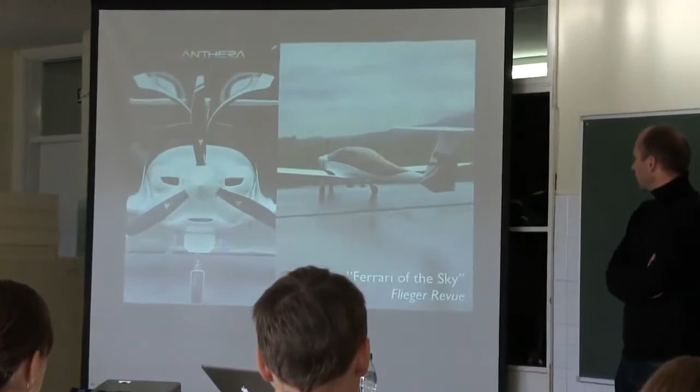This is the first exit of our company from the ultralight or light sport aircraft market into the fully certified private pilot territory. This is a general aviation aircraft, four-seat, designed for high aerodynamic efficiency and also designed to appeal. I will focus on this design later, but this aircraft didn't even fly yet. This is just the prototype built, and right now it is in the structural testing phase. We expect the first flights to begin later this year.

Okay, this is a design cliche. All the designers know this is such a cliche that I will not even go into it, but it's attributed to Louis Sullivan, a modernist architect who says that form should follow function and not vice versa. So whenever you design a product or a building or whatever, the form should follow whatever the purpose of the object is. And this is according to Wikipedia, if you can trust random strangers editing things.

What was interesting is that on the same page, you can find the sentence that modernists believed, perhaps incorrectly, that airplane design did not involve any aesthetic decisions by the airplane designers. So airplane design at that time, in the modernist era, was considered the purest form of design, because the aircraft is designed just to perform its function, and its form follows from that function. So aircraft design is interesting from that point of view.

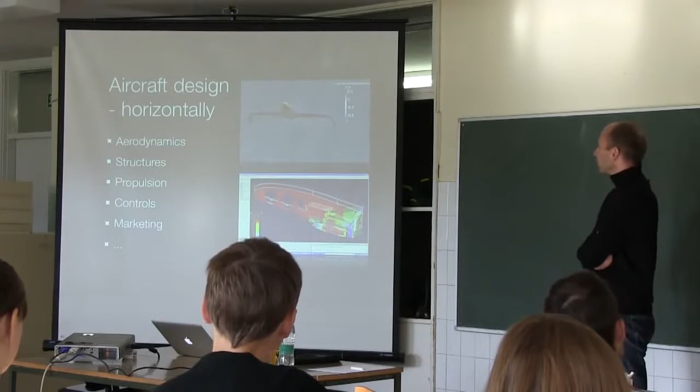Structural design is just as important, if not more, because if you cannot support the loads experienced by the aircraft properly, the aircraft breaks in mid-flight, which is of course not desired. But if you build the aircraft too strong, too conservative in structural design, you create an aircraft that is too heavy, and weight is the killer for aircraft performance. So optimization of structures is just as important as aerodynamic optimization.

And then you need experts from propulsion technology. Right now electric aircraft are gaining a lot of attention, but piston engines and turbine engines are still the main engines in the market, so you need experts from propulsion, from controls, and don't forget the marketing aspect of any design. If you cannot sell the aircraft, you have to start all over again. Usually in aircraft design, each project is so expensive and takes so long that without a clearly defined market and expectations, a single project can really kill the company.

So even for big companies like Boeing, if they had failed with the Dreamliner, which didn't get off to the best start but is a successful design, you can quickly bury the company with a single wrong project. So this is all the knowledge that you require.

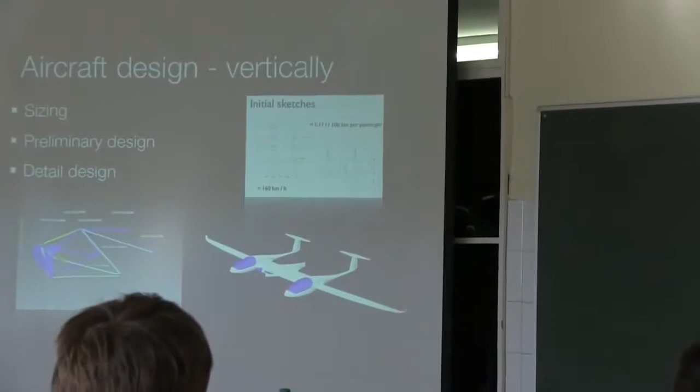But how do you apply this knowledge? What I'm following here is just standard textbooks. There exist textbooks on aircraft design, and typically the process is split into stages. You start at the top with the idea, and then you size the aircraft—this is the first step. First you figure out, based on very simplified models, how the aircraft would perform if it had such a wing, such a long fuselage, etc.

You estimate how the aircraft will perform and then iterate the shape of the aircraft, the general shape, the layout. This is on the level of how big the wing will be, how large the wingspan will be, how long the fuselage will be. Then you estimate the weights, etc.

And then you sort of get an idea of how big the aircraft will be and all of its surfaces. However, even at this stage, you need input from all the disciplines I mentioned. Namely, aerodynamicists will tell you how big the wings must be to carry such a structure. The structural engineer will tell you how heavy the aircraft will be estimated when you draw a shape, etc.

So already at the first stage, you need a complex team of people working together on the design from the very start. So if you listen just to your aerodynamicist, or just to your structural engineer, or just to your propulsion guy, you will just focus the design on some aspect and you might fail completely because it won't take all the aspects of the design in the beginning.

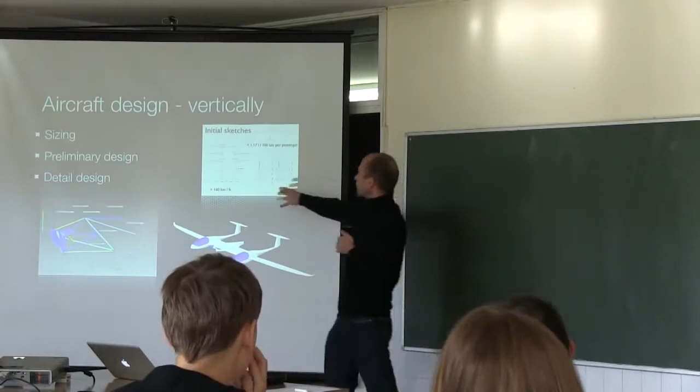After you are quite happy with the sizing, this is an example of the sizing of the aircraft, different sketches. You try different configurations, and this is a very quick process, so this can be done for a small aircraft in a month or so.

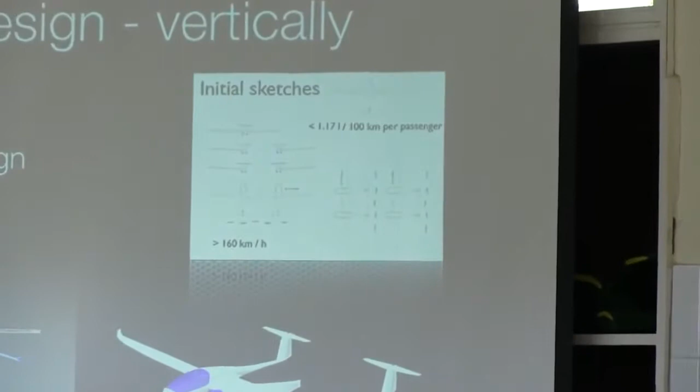Then you go to preliminary design, where you take this general geometry of the aircraft and you actually start building proper surfaces for it. Namely, you will set the aerodynamics for the aircraft, choose the wing sections, basically design the general shape, and the general structural concept of the aircraft, but you do not go to the finest details like every bolt and every screw, etc.

This is something left for the last stage, detailed design. So in the sizing stage, you have a couple of engineers working, then in the preliminary design, the team expands, and then when you go to detailed design, for example, this is an example of an engine mount, where you have to have all the mounting points, etc. This is where you need, in the end, the biggest team.

And when you get to the detailed design phase, you better be sure that the preliminary design will work as expected, because going backwards to revise the design at this stage is very, very expensive and time-consuming. But it happens, so you do revise design, you just have to be careful not to do it too often.

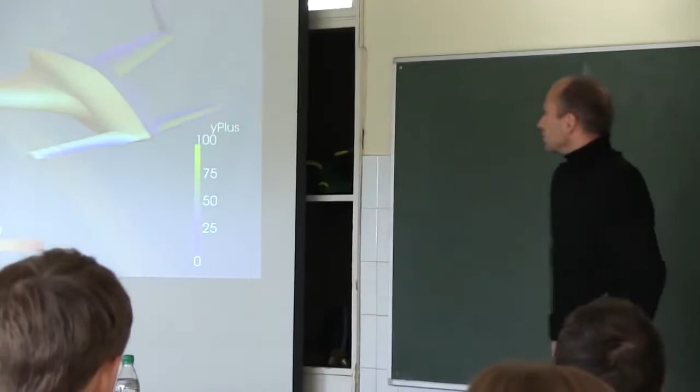Here I'm showing some study of what I do, really. So sometimes we just take over only parts of the design. I will tell you how complex the design will be and how different fields, namely in this point it was marketing versus aerodynamicist, can work on a problem.

This was a project given to us by an Italian company who designed this general shape. As you can see here, it's a canard aircraft, meaning that the elevator is on the front surface, for those of you who like aircraft, and the wing is in the back. Not a very good configuration if you ask me, but the marketing likes it, so they said, okay, but we lack lift. We lack about 50% of the lift we need for the aircraft to perform the minimum flight speed.

And of course, we would say, well, that's because it chose a canard design, but marketing said, okay, you have to work with this - their marketing department, not ours. And they said, okay, you can work on the external shape, but do not change the aesthetics. So how can you do that? How can you work on the shape but not change the aesthetics?

And sometimes in aerodynamics, you can do just minor things, minor details that can help. The top is the original design, the bottom is our optimization of the design. We gained about 50% of lift with the bottom, and it's quite hard to distinguish any differences between top and bottom.

What we did was change all the airfoils, redesign the front flap, but the general aesthetics of the aircraft remains the same. We did have to increase the wing in the end by 10%, but still we gained 50% lift with just minor changes. So you have to play between two aspects sometimes to optimize the design, and then you can get both teams happy just as long as you listen to each other very well.

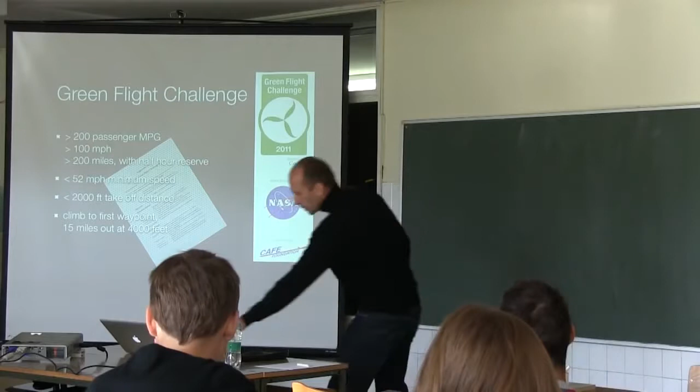Okay, who hates imperial units? I do. This is better. So in more common units, these were the requirements.

The booklet was about 50 pages thick of the regulations, but these were really the requirements which fixed our design, let's say at least at the sizing stage. And then later on we had to, of course, take other aspects into account, but these are really the constraints for the aircraft. Namely, the aircraft had to spend less than 1.17 liters per 100 kilometers per passenger.

So if you had 4 passengers, then you could spend 4 liters of fuel, or energy equivalent of regular gasoline. So clearly, because of the energy conversion efficiency, electric aircraft were favored in this competition. If you can get an energy efficiency conversion of about 40% for a piston engine, electrical energy conversion from batteries to propeller is about 92% in our case. So there is a clear difference.

However, the aircraft had to have this efficiency at speeds over 160 kilometers per hour. So this was no easy task. And at the same time be able to cover more than 300 kilometers of range with half an hour reserve energy left on board after landing.

Furthermore, the minimum speed had to be below 83 kilometers per hour, another very critical issue. And the takeoff distance had to be less than 600 meters. And at the same time, this was mostly on the front page.

But then later, if you go through the regulations, when you see what the course was like in the competition, you realize that you had to climb to the first waypoint, which was 24 kilometers away from the airport at the height of 1,200 meters. So you required a certain climb rate to be able to reach this altitude quickly enough.

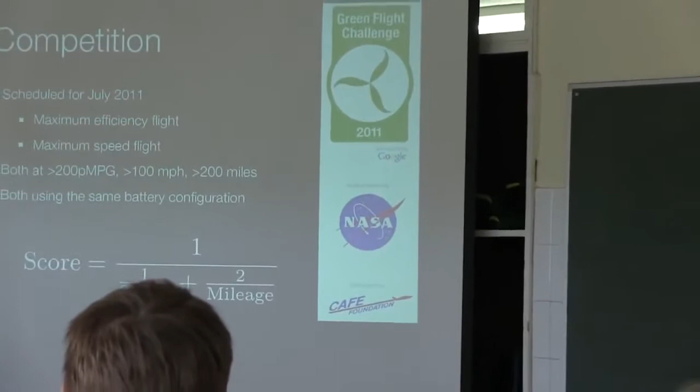So the competition itself was originally scheduled for July 2011 and was comprised of 2 flights, namely 2 days of flying. On one flight you had to fly with the maximum possible efficiency of your aircraft, and on the second day you had to fly at the maximum possible speed that your aircraft could reach.

However, there were hard constraints. During both flights you had to fulfill all of the requirements I said before. So namely, your efficiency had to be good enough and you had to be faster than 160 kilometers per hour.

And furthermore, the competition stated that you were not allowed to change battery packs on your aircraft. If you had an electric aircraft, the battery configuration was frozen at the moment you took off for the first flight. So on the second flight, you had to have the same battery configuration. And these are the requirements that really limit you.

What is the problem that you freeze the battery configuration? For those of you who work with batteries or who know how batteries work, what's the biggest problem with batteries for aircraft?

Sorry, they are very, very heavy. Yes, so if you want to fly fast, you will of course burn more energy. If you want to fly really fast, you need more and more batteries.

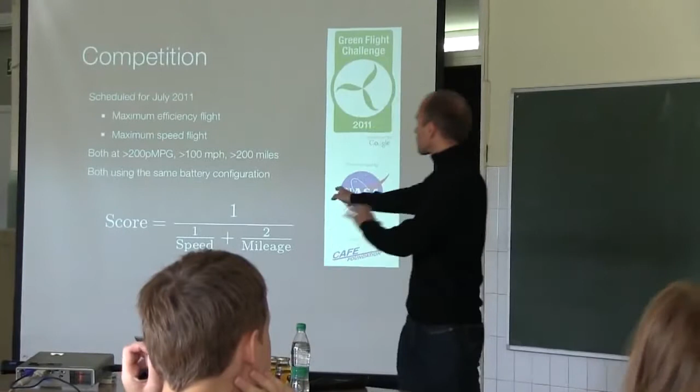However, if you want to fly efficiently, you need a little weight, so you have to reduce the amount of batteries. You have to have a compromise on how many batteries you put into the aircraft to get the best result. The total score was taken from 2 flights, and if you take imperial units, there is a formula: speed is in miles per hour, mileage is in passenger miles per gallon, and then you get some result from both flights.

So what did we do? We wanted to compete in this competition, but when the competition regulations were published, there was simply no aircraft that would fulfill them. They simply didn't exist. So we said, okay, we have to design something new.

We started, of course, with the 2-seater aircraft. This is what we had, and then did a concept study. However, the problem was we wanted an efficient aircraft, so it had to have a retractable undercarriage, and only the Taurus aircraft, the glider from our range, has a retractable undercarriage.

And the problem was where to put the engine. If the engine was put on the mast, as you've seen before, then you get such a forward pitching moment that whatever efficiency you gain in putting the engine away, you lose because you have to trim the aircraft. You have to pull really hard back on the stick to keep level flight. So that was really not such a good idea.

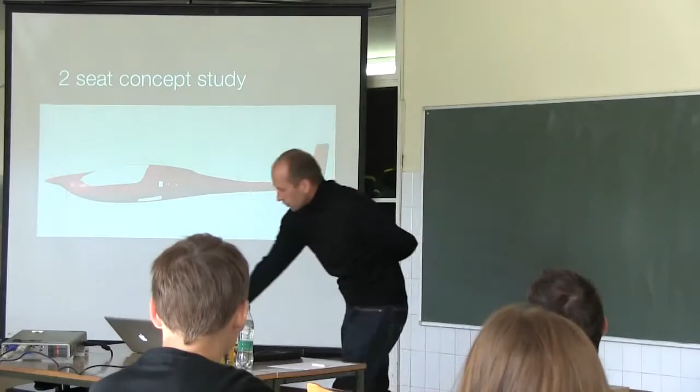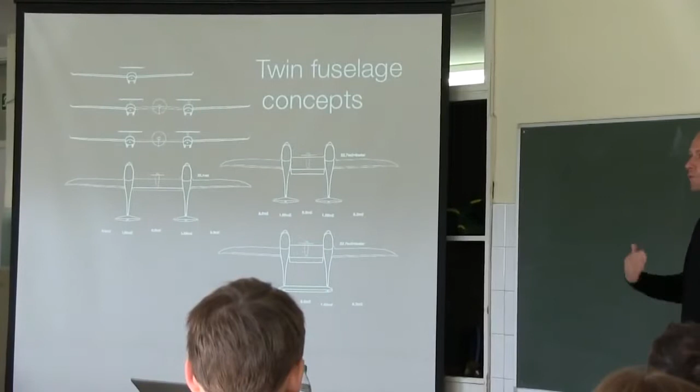So we were looking at whether we can put it on the nose or whatever. And then the colleague of ours who was the project leader for this said, why don't we take 2 fuselages? The regulations state that you have to have consumption measured only per passenger, not total consumption, so we can build a bigger aircraft and still reach a similar result. However, then there is no issue with placing the engine anymore.

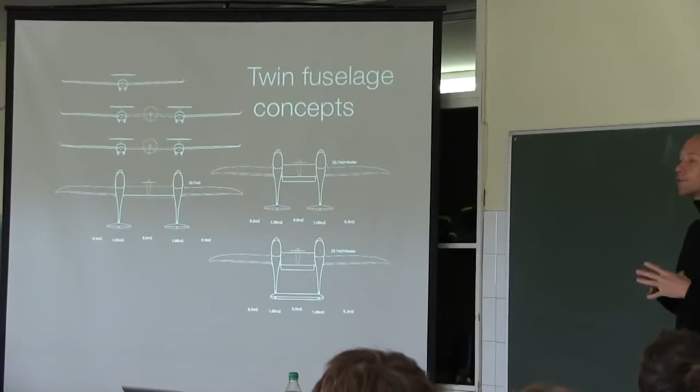So if you take 2 fuselages, separate them, put an extra wing in the middle, then you can put the engine there in the middle with the propeller, and you have a good concept.

So when we first saw the sketch, we said it's stupid. I mean, why would you build such an aircraft? But then the more you think about the idea, the more sense it made.

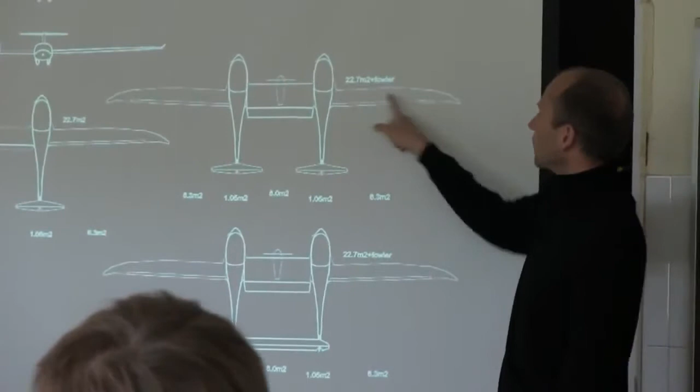In the end, we realized that this way we can use a lot of standard components, namely the fuselage is standard, the tail is standard, the external wing is standard. What we had to design was the thing in the middle between the 2 fuselages. And then there was the question, of course, if all of these parts are standard, how far apart to put the fuselages?

Of course, if you put the fuselages further apart, this increases your flight efficiency. However, it decreases the handling qualities of the aircraft - how the aircraft behaves when you roll it or when you yaw it. So there was a compromise between these 2 aspects.

Our boss said you should not separate the fuselages by more than 4 meters. So we separated them by 5 and never told him about it. It's an easy solution.

Because we wanted to go further forward, this was actually the final design, and you will see that it gave us problems. Namely, this section is much thicker than this part - let's call it thickness for those of you who are not in aeronautics. And if you have such a distribution of surfaces, then it gives you some problems when generating high lift, and you will see these issues occur and how we successfully solved them.

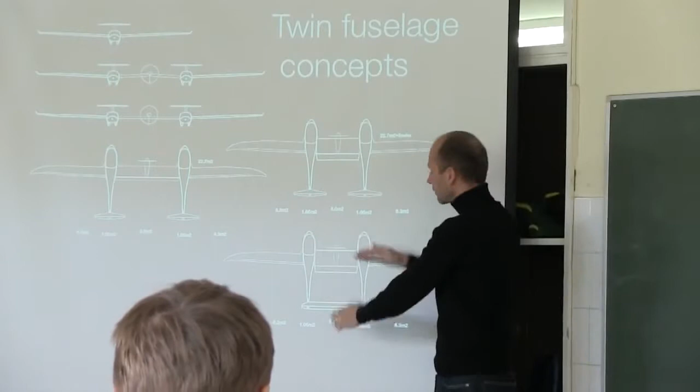What I forgot to tell you is that the total area of the wing is fixed. Because for a certain amount of lift to fly at a low speed, you need a certain area of the wing. So if you want to bring the 2 fuselages together, then you have to increase the chord of this wing so that the total area remains the same. So you can see either you make such a configuration or you make such a configuration.

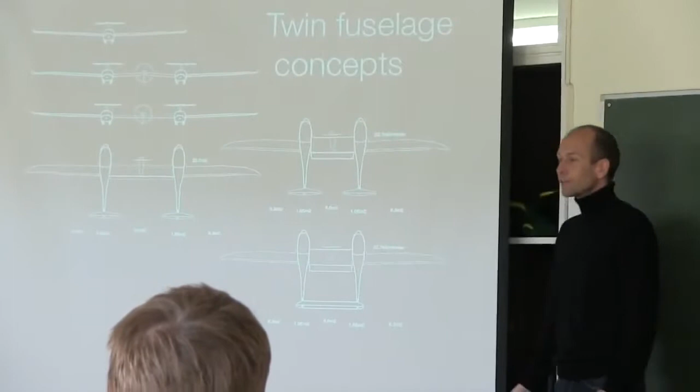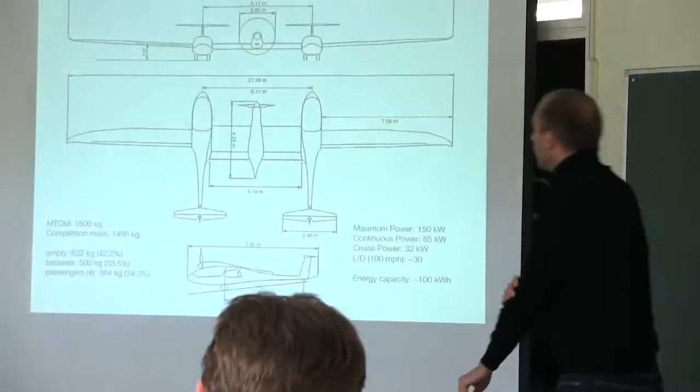In the end, we had a compromise as usual. In December 2010, and remember July 2011 was the competition schedule, we finalized the sizing of the aircraft. So this was the sizing process: how big the central wing section will be, estimated the weights, and did the structural concept.

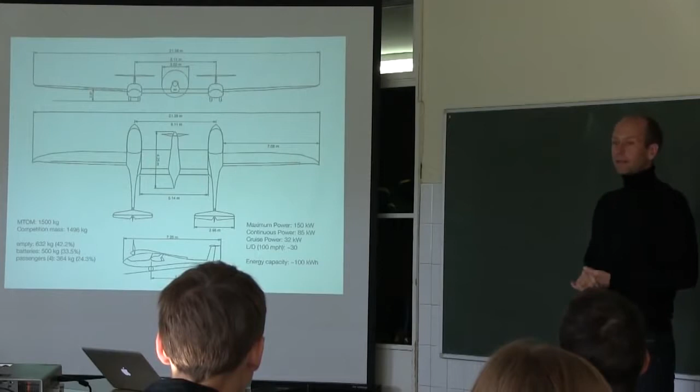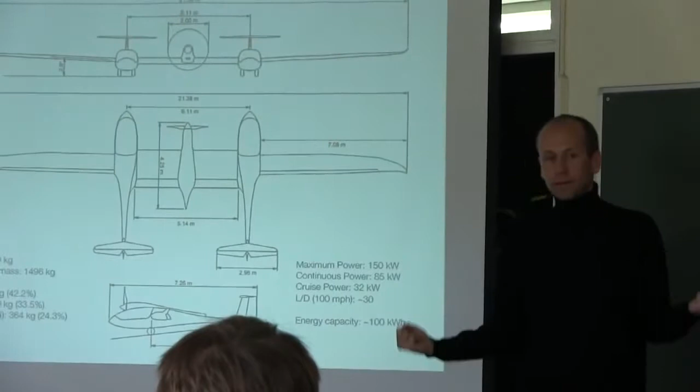What is really important in such a twin fuselage design is that structurally it is much lighter than if you had a single big fuselage at the center and a very long wing. Because if you had the fuselage in the center and a very long wing, you would have a lot of bending moment in the center, and to handle this bending moment, you need a very massive structure at that point to carry these loads. But if you distribute the loads more evenly across the span, then the structural weight of the aircraft goes down, and this was one of the key reasons why we were successful in the competition with such a design.

We estimated the maximum takeoff mass to be 1,500 kilos, and in the end, when we built the aircraft and put it all together with the passengers, the competition mass was almost spot on. And then there is the splitting of the weights.

The weights were split between different parts of the aircraft. The empty aircraft weight, if you take the batteries out and consider them as fuel, was 632 kilos. This included the engine and all the structure, but without pilots and batteries. There was almost exactly half a ton of batteries on board, so a third of the weight was just batteries. There were then 4 standard passengers on board, but the aircraft never actually flew with 4 passengers — you had to carry ballast instead if you didn't carry 4.

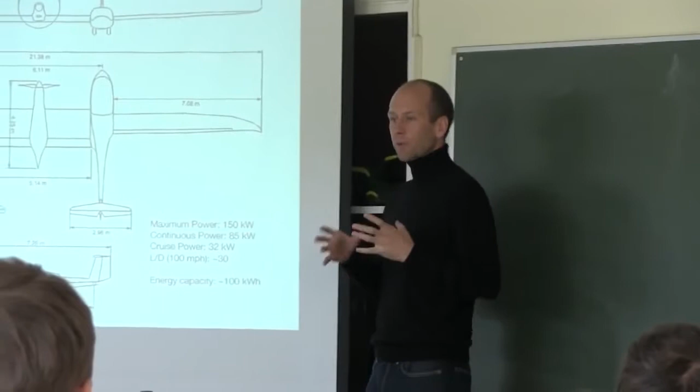What is also interesting is the power requirements. Cruise power for the competition was estimated to be 32 kilowatts, which is a fairly small engine. However, if you wanted to take off in 600 meters, you needed at least 150 kilowatts of power. So even though you would require a much smaller engine to be most efficient, you need a big engine to take off within the 600 meters required.

Furthermore, the engine required a continuous power of 85 kilowatts just to climb to the first waypoint. The lift-to-drag ratio, or the finesse of the aircraft, was about 30, and the total energy capacity of all the batteries was 100 kilowatt hours.

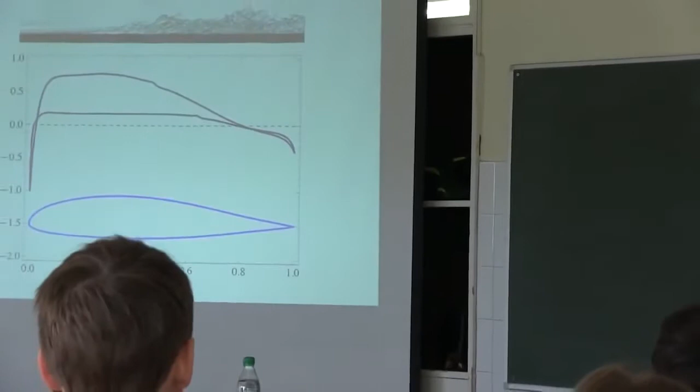This is the work I did, and I'll show you the aspects I know best. I was in charge of designing the aerodynamics for the aircraft — designing all the new external surfaces, designing the new propeller, and working with a team of engineers from structures and electrical propulsion to get everything sized correctly.

So I did the sizing first — determining all the surfaces, their sizes, and actually designing them in the end. What we had to do first was design the central wing. This was the most important part, this big slab.

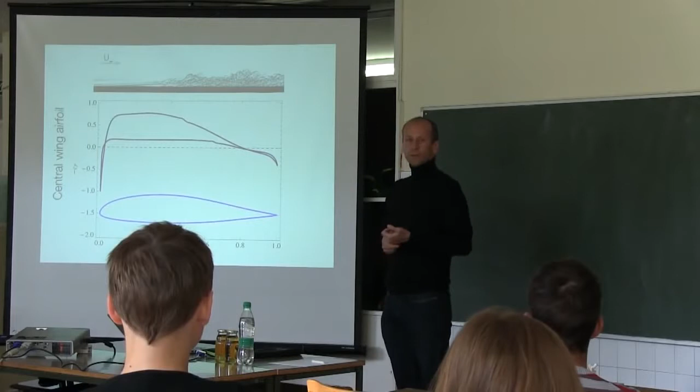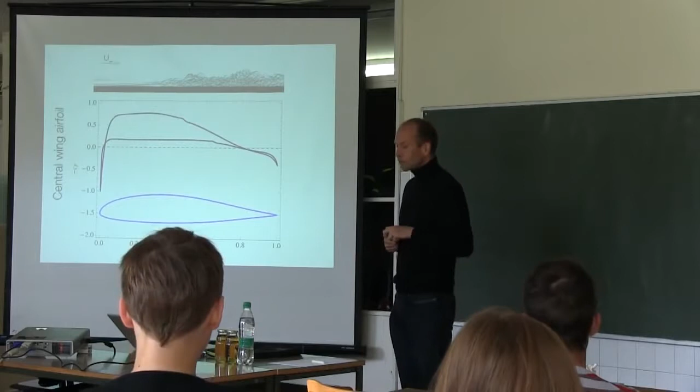I designed a special airfoil for this aircraft, a low-moment airfoil, so that we reduce trimming drag, for those of you into aircraft design. It's an airfoil with quite a lot of laminar flow — on the bottom side up to this point approximately, and on the top side up to this point.

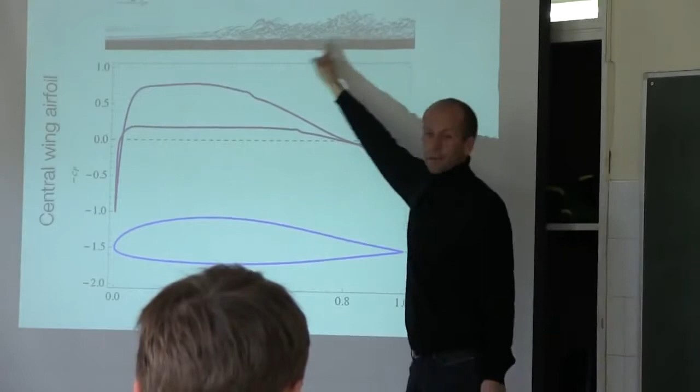Laminar airflow means much less drag than you'd have with turbulent flow. For those not familiar with fluid dynamics, when air passes near a surface, it first passes cleanly, but at some point, due to instability in the air, vortices start forming, and this causes drag. So you want to design your surfaces to have as much clean flow around them and as little turbulent flow as possible.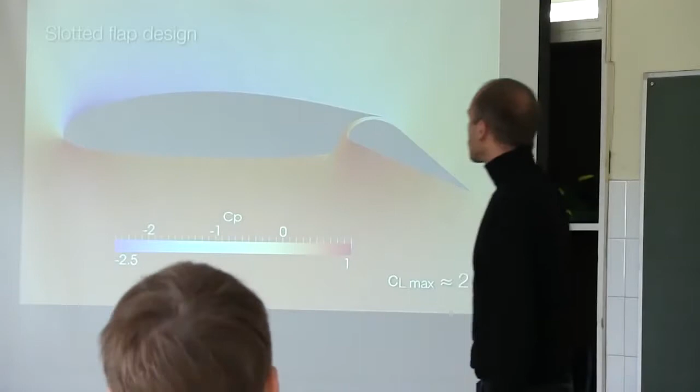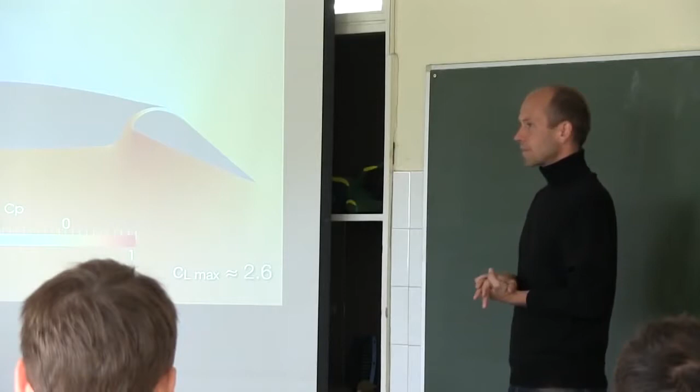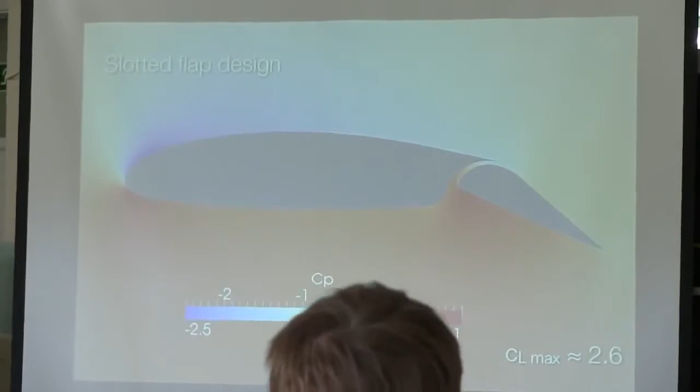We then designed the slotted flap for the central wing section, using computational fluid dynamics tools from the very start — while still designing the aircraft, you can use computer tools to optimize certain aerodynamic devices even further. We designed a special slot in this area which helps with the airflow. The CL max was estimated to be 2.6, and in flight tests it was actually proven to be the case.

One of the key causes of drag is not just turbulent flow or skin friction, but also the mixing of air because of lift generation. Any aircraft that generates lift also generates drag, because it creates vortices in the flow. These vortices carry energy, so when you create lift, you also create drag — this is called lift-induced drag.

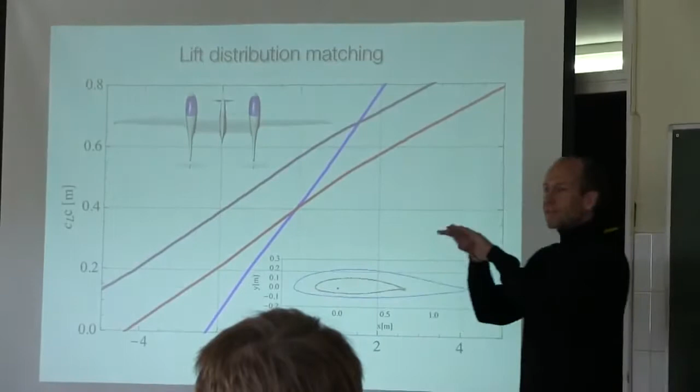However, to have as little induced drag as possible, you need to have the lift distributed very uniformly along the span of the aircraft. Each section of the wing should carry roughly the same amount of lift, except for the tips. The ideal distribution is elliptical, but in this transition area we're most interested in, the lift distribution should be as uniform as possible.

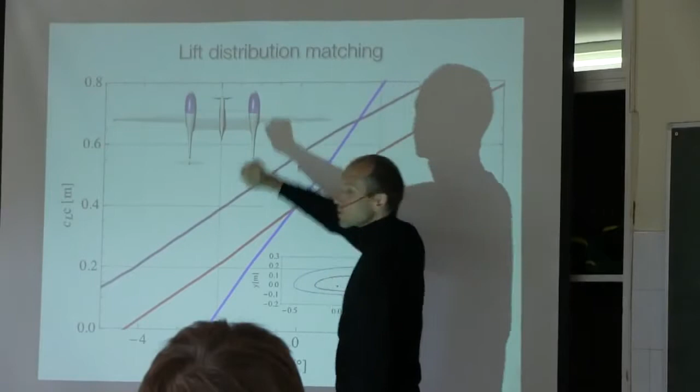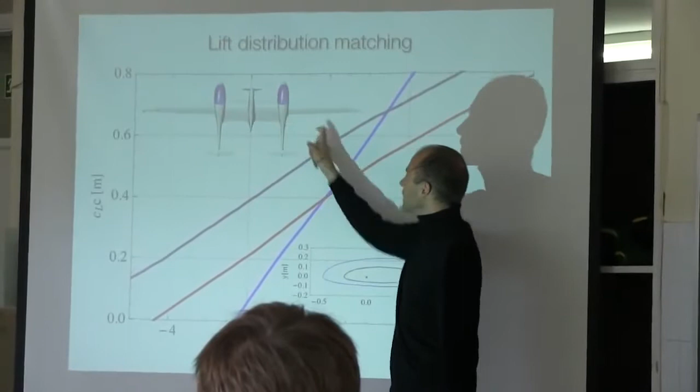However, the surface distribution in such a design, which is a compromise, is not uniform. This is a much thicker surface than this one, and we had to figure out how to match the lift of these two sections so that we would not stir the air too much. Our suggestion and implementation was that all of these wings have trailing edge devices, so-called flaps.

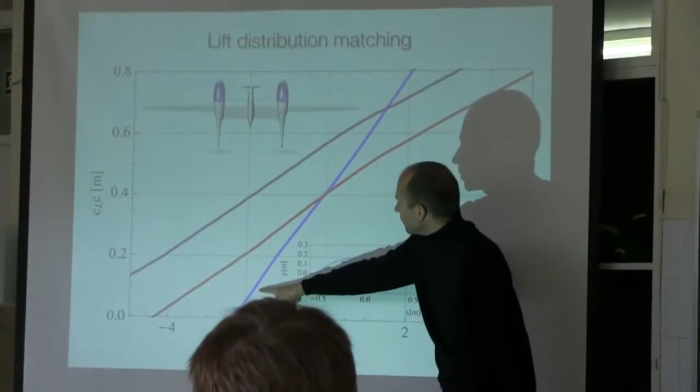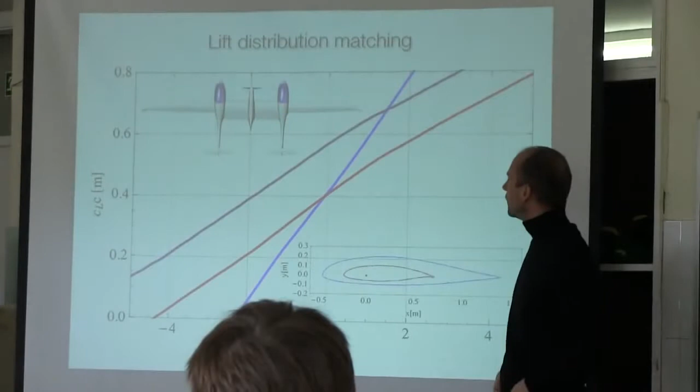By deflecting the flap on the outboard wing, what I'm showing here is the lift distribution. Blue is the central wing, and red and purple are the outboard wings for two different flap settings. This is the angle of attack, how the wing is coming onto the airflow. By changing the flap angle, you can match the lift distribution at a certain angle of attack, or if you deflect the flap further, you can match it at another angle of attack. So even with a compromised design in terms of surface distribution, we can still tailor the aerodynamics so that the efficiency of the aircraft is good.

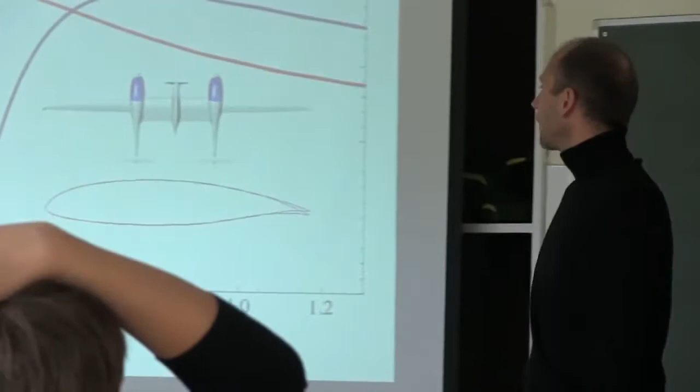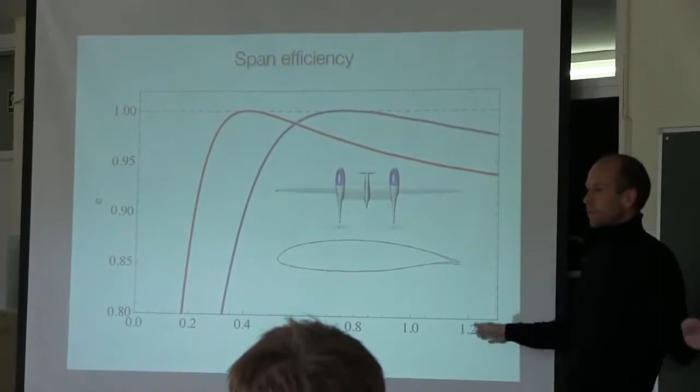Here you can see the span efficiency of such an approach. One is the theoretical best efficiency of any wing of a certain span. By changing the flap setting, you can get ideal efficiency at different angles of attack just by deflecting flaps differently. This wasn't a new idea, but it was implemented successfully.

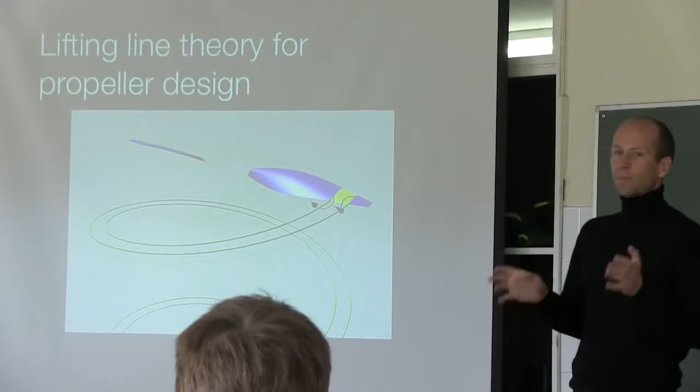Then I did some propeller design. Again, I developed computer tools to design propellers, using the lifting line theory for those of you in aerodynamics, which allows you to calculate the power demands and thrust of propellers. We created computer programs which automatically optimize the shape of the propeller, where you can just say, I want this sort of power on my propeller, and I want the best thrust for it, and at this speed, I want that power.

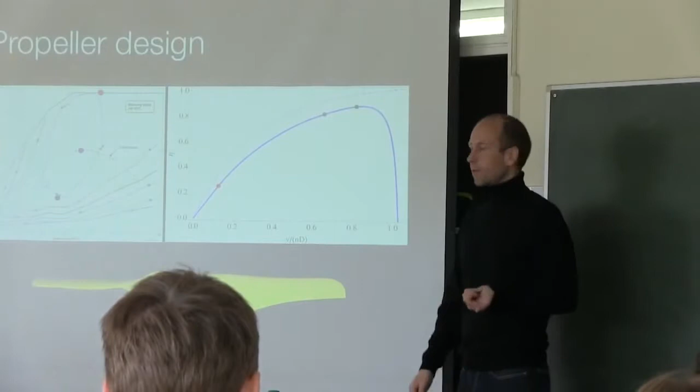So I had a 3-point design for the propeller, and this is a result of computer optimization, the ideal shape in the end. This is the shape of the propeller. We went deliberately for a fixed pitch propeller—some propellers you can change the angle—simply because it's simple to build, one less system to care about, making the aircraft more reliable. We had a very limited time frame, so we wanted as simple a design as possible.

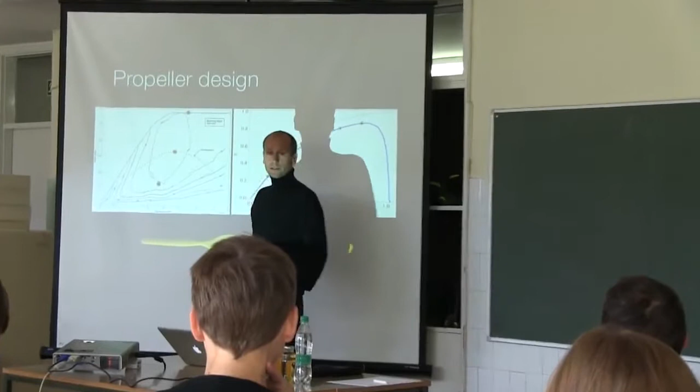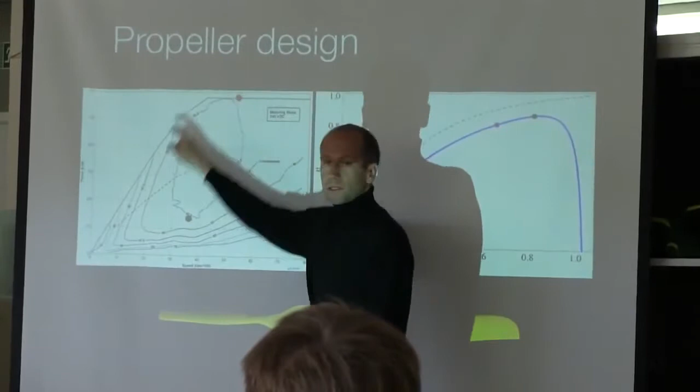How was the propeller designed? I told my computer program this is the map of the electric motor, the best efficiency of the electric motor. Here is the speed in revolutions per minute, here is the power in kilowatts, and these ISO curves show the efficiency. This is the island of best efficiency for the engine, and you want your propeller spinning at such a speed that you are always as close as possible to this best efficiency area.

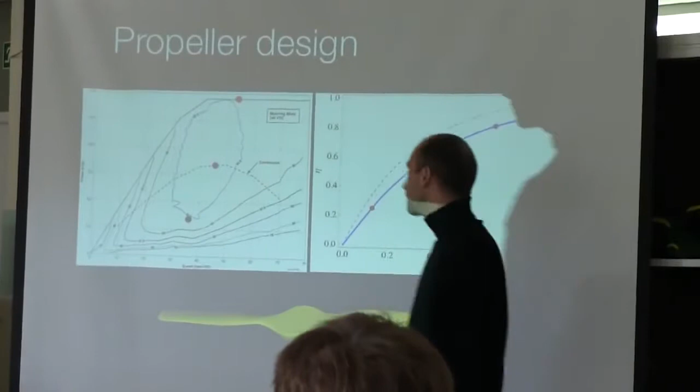This point here represents the takeoff point for the propeller in the final design, this is the climb point, and this is the cruise point. When I told the computer to work with this, this is the result, and it's quite a nice shape to look at too—a lot of people admire it. Sometimes you get very interesting designs just from some mathematical procedure, and in the end it looks almost like a work of art.

So then, just with a simple iteration, which took no more than an hour to change the shape, we just bulged the area a bit, but not too much, so as not to increase the surface area too much. Then you get nice clean airflow. This is all done still in the preliminary design stage—not flight testing, and you don't even have to go into a wind tunnel right now when you have CFD analysis. Of course, it would be good to have wind tunnel analysis, but not in the time frame that we had for the project.

The design external shape was frozen by this point, and then we went into building the first pieces. What was interesting is that this design was not completed totally before going into production. We just defined the external shape and the basic structure, and then we started building components, and the controls were designed on top of that, etc. So there was still design going on while prototyping was already taking place, just because of time constraints.

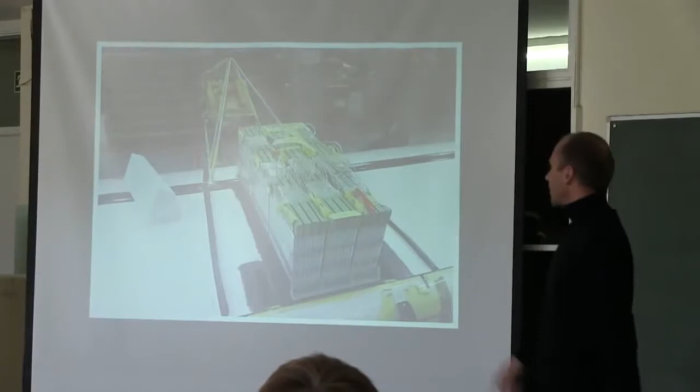And you see these battery packs now being put onto the aircraft. We had 3 battery packs, and we distributed them, one in each fuselage and one in the central nacelle, and this distributes the weight as evenly as possible across the span, and this gives the aircraft efficiency because the structure can be lighter. So this is one such battery pack of 9 batteries, and in the front, this is the engine mount and the engine itself.

This is the testing of the engine mount. This was also optimized before being built using finite element methods to analyze the structure. So we really sized the thickness and diameter of all the tubes to get the right structural requirements, and we followed all the standard testing procedures for aircraft.

When we presented this optimized design to our technical guys who actually built it, they said this will never carry the loads, but then we did all the tests and it was doing just fine. This was really a confirmation that these design methods work, namely that you can, on the computer, already estimate all the loads, with a certain margin of safety, because a computer model is never good enough, but for this purpose it worked just perfectly.

On the 30th of March, we tested the whole wing structurally, not just the engine mount. This is the most important structural member of the aircraft, the whole wing assembly - you have the central wing, and to each side the external wings.

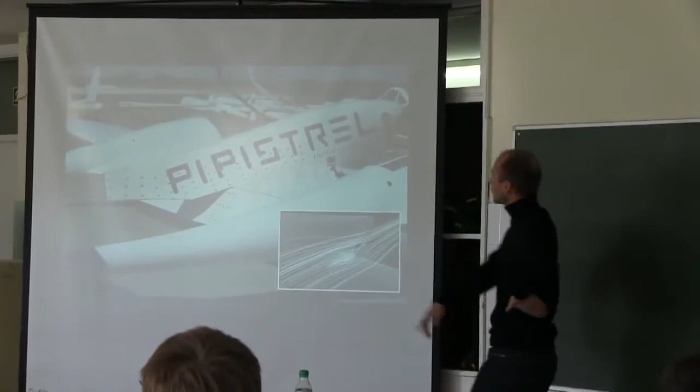Of course, we had to test whether this worked or not. In full flight testing, we could test whether this idea really worked. So I put some tufts on the airplane, put a camera here, and then we checked whether the flow here is regular or not - which was a good thing that we did this.

The flow was quite regular here, but this was structurally very light, and the whole thing from the pressure coming from the cooling just bulged apart. So what you can see here is actually some airflow exiting to the sides. This part was okay, but there was airflow from them going outwards instead. This is something we fixed. We wouldn't see it from the aircraft itself, but with the camera we saw it, and we fixed this issue, which was causing quite a lot of drag. And then we had some problems with minimum speed, of course.

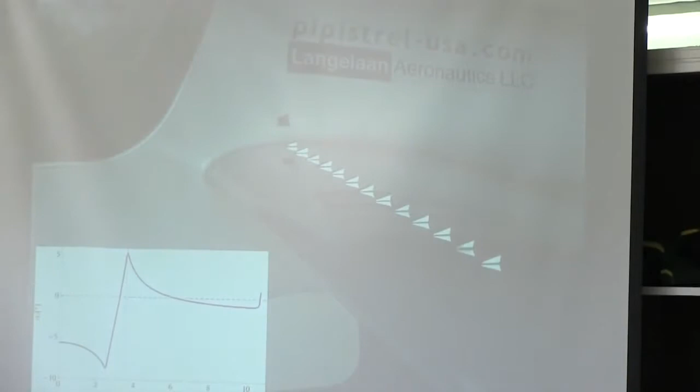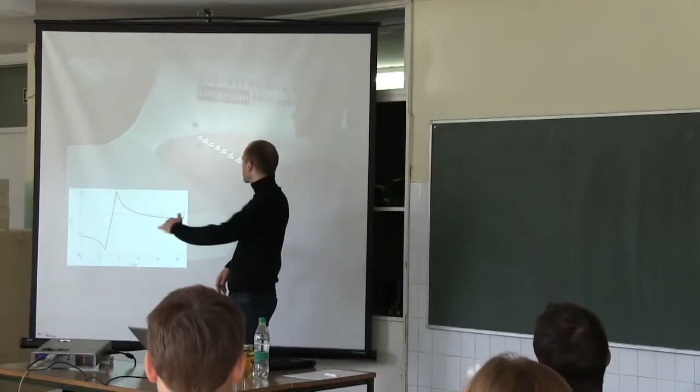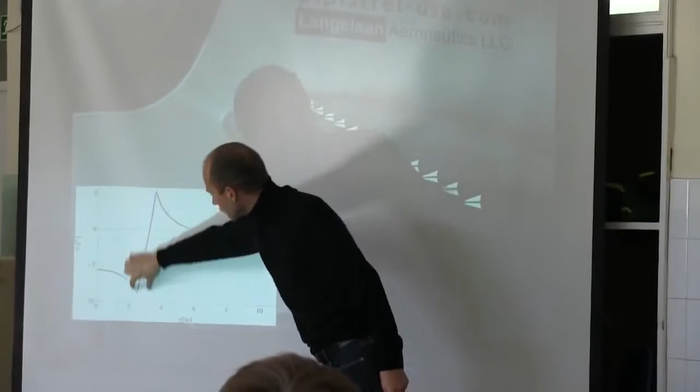What happens is, when you fly very slowly, that central section, especially with this flap which we designed, which carried a lot of lift, causes a lot of these vortices. Then you have two vortices around the fuselage itself. So the local airflow is not coming straight at the wing, but because the central wing is creating a lot of lift, the local airflow here is going upwards. This is the graph of how much it's going upwards along the span. This is the part of the fuselage, and on the outward span you have a lot of upflow on this part of the wing. What is happening is that this part of the wing is not generating any lift anymore. It's stalled, and we installed some micro vortex generators to correct for this, and it worked brilliantly, but it causes a bit of drag. However, minimum flight speed was something we had to fix, and we tried this, and then we moved them until we reached the proper minimum flight speed before stalling.

So these are now the corrections in the design, which you can get from the evaluation of the design.

What is really interesting though is that the pilots, any pilot that flew it for the first time, aligned the aircraft wrongly, because you do not align it on the center line, you have to align it slightly to the right, of course.

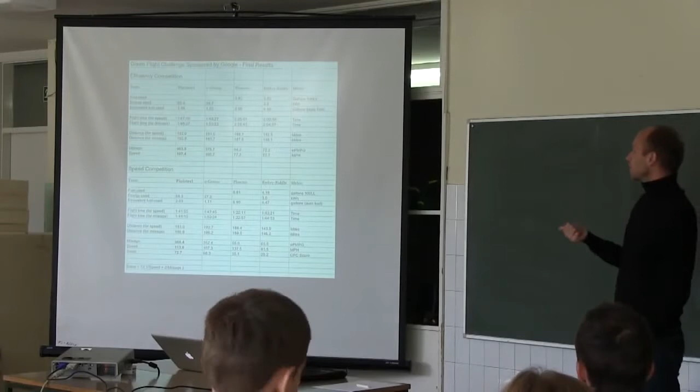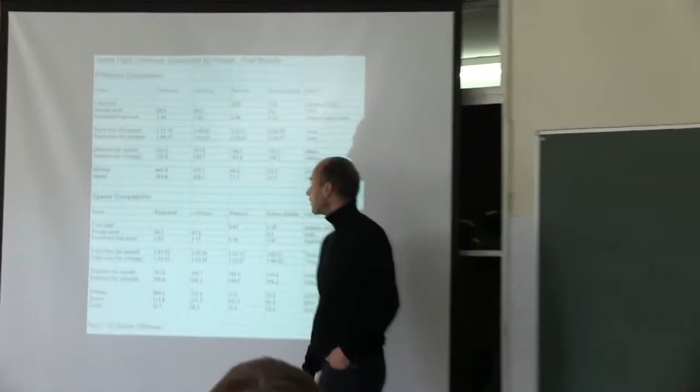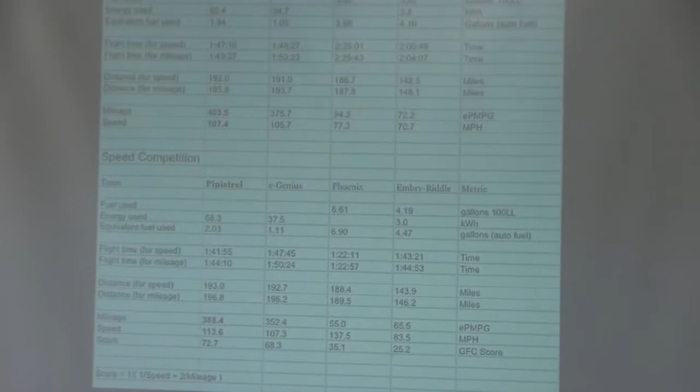What are the results? We actually did win in both categories. We were the best in efficiency, twice as good as was required in terms of energy conversion. If the mileage required was 200 passenger miles per gallon, we did 400. The next one was the E-Genius, with 375. The speed was also the best from us, 113 versus 107. Of course, the aircraft could go faster, but not on this battery pack. That's the fastest we could go.

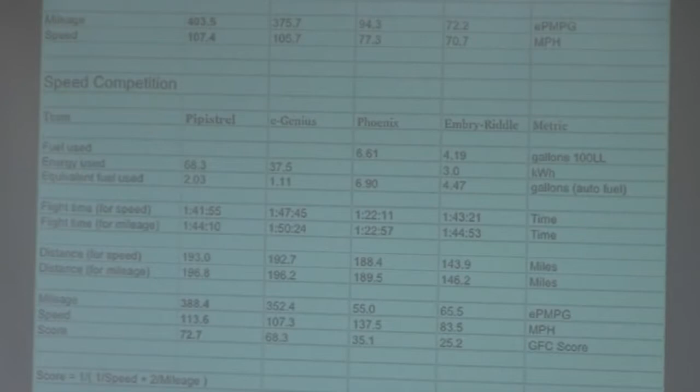You cannot see the weights here, but this is the main differentiator between our aircraft and the E-Genius. The E-Genius weighed about 900 kilos for 2 passengers. We weighed 1,500 kilos for 4 passengers. That's where we gained the most, maybe about 70 kilos less per passenger, mostly because of the twin design.

For a while we featured on the main NASA homepage, so that was quite nice. This was also important for those of you in aviation: we were nominated for the Collier Trophy Award for 2011, the biggest award given for achievement in aeronautics in the US. Space shuttle teams had won before, and this year the Boeing Dreamliner won, but we were a serious entry.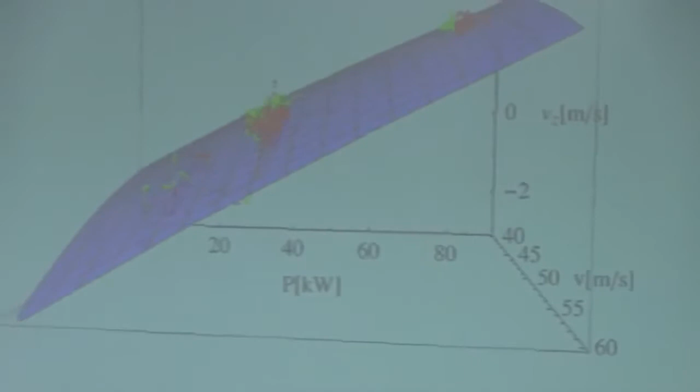Of course, in the end you want to know how well the aircraft performed, so this is a very engineering part now. We did have our own model of the aircraft. We didn't know exactly how much drag was on the aircraft, what's the total drag of the airplane, so this was the only calibration parameter we had in the model.

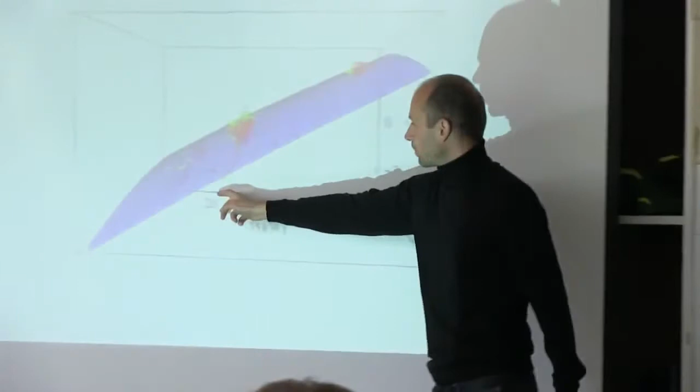So then we just fitted this surface to the data points. What is shown here: on one axis there is the power demand on the motor, here is the speed of the aircraft, and here is the vertical climb or descent speed. If you do an aircraft model at a certain altitude, this falls on a single surface.

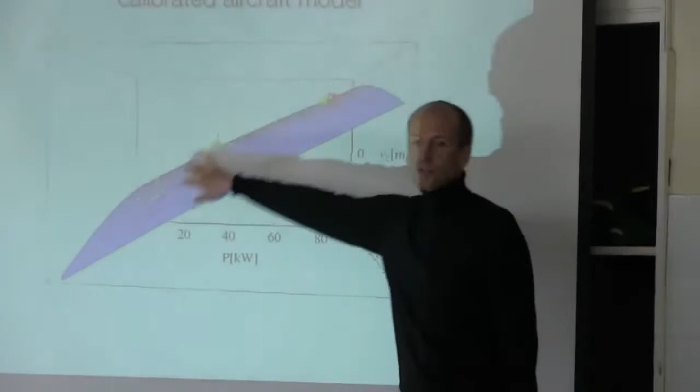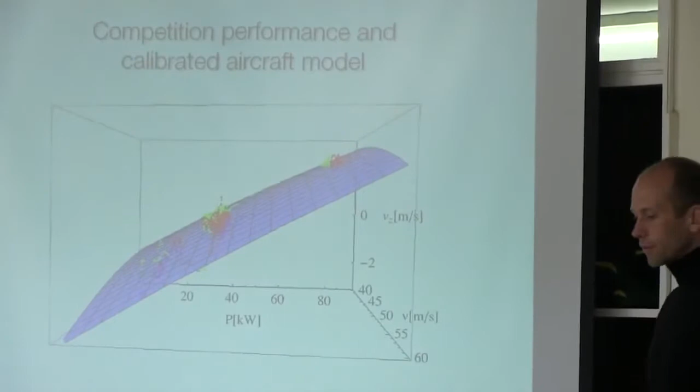The red points are the data log points from the competition flight, the speed competition flight, and the green is the efficiency competition flight data log points. You can see that the model works quite well.

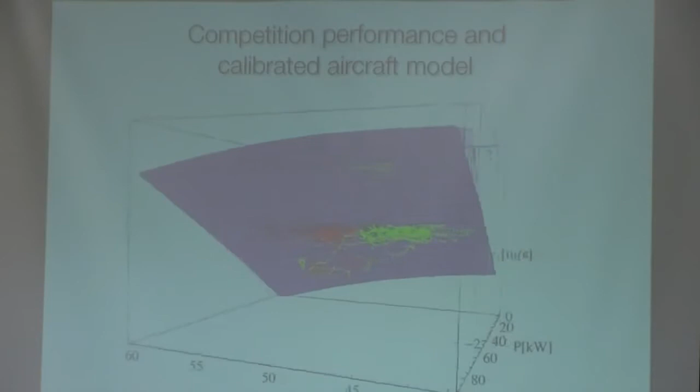What we were surprised about, though, is that at high speeds it's more efficient than we predicted. We have no idea why. We didn't fly the aircraft after the competition properly to evaluate it, but we were not very far off from the initial design estimation to the final design.

So the total lift to drag ratio at the competition speed, which was 160 kilometers per hour, is at its maximum—so the least drag for the lift created. That's a good design then. Just at the speed you require, it was slightly above 32 if you use this calibration.

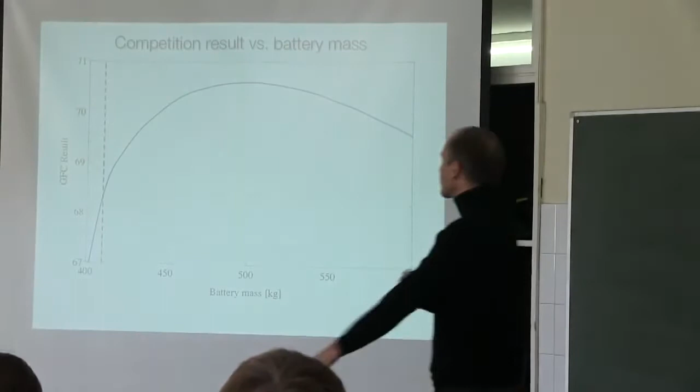This is an interesting result. Then we used our model and said, okay, what if we use less batteries or more batteries for the competition? So what is the problem? If you use less batteries, what happens?

You gain in the efficiency flight, but you lose speed in the speed competition. On the other hand, if you put more batteries in, then you lose efficiency, but you gain speed because you have more capacity.

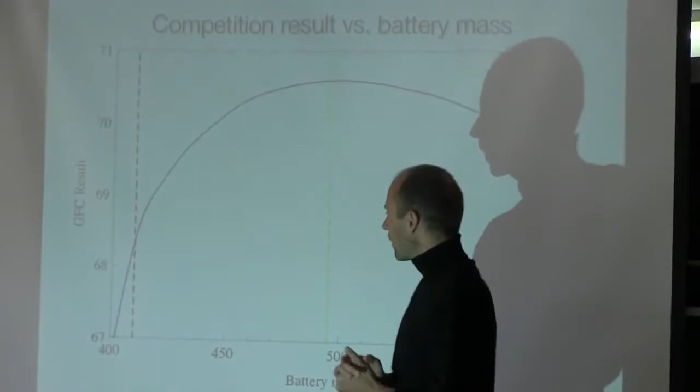So the red point determines what's the minimum amount of batteries with which we could fulfill the requirements, namely about 400 kilos. This is our actual battery mass, green, and you can see that whichever way we would deviate, we would not be better. So that is quite remarkable.

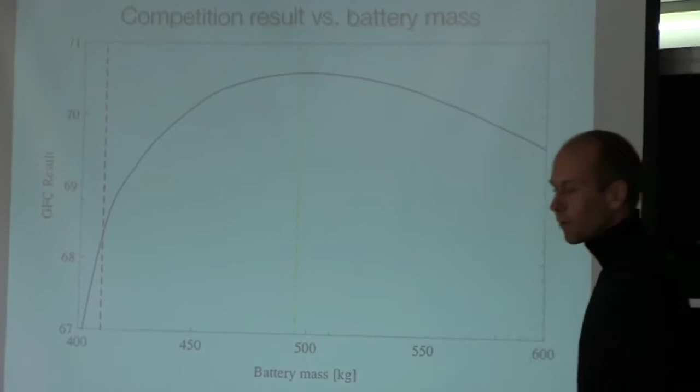We knew that we would be close, but in the end, when we calibrated everything from the data, we were quite surprised that we were so close to the optimum.

So that's the aircraft, just to have more of an impression, just a few shots, just to have an idea. And so much for this project. So do you have any questions about this project right now?

What kind of motor did you use for this electric motor?

This is a standard off-the-shelf motor, slightly modified for our needs. It comes from the automotive industry—it's supplied mostly to the automotive industry, and it's a 150 kilowatts instantaneous or 85 kilowatt constant power motor.

Is that a Slovenian motor? No, it's American. There is simply none available in the market. For this kind of aircraft, there simply was not a proper motor. Otherwise, for our other electric projects, we use Slovenian motors. But for this competition, there was none available, or there was no time to develop it.

Why did you have to present yourself as an American company? That's the competition rules, they just wanted that. NASA was giving away taxpayer money, so it had to go to US entities. Simple as that.

And what about the batteries? Is there any possibility to use another type? Because nowadays we have a lot of variety.

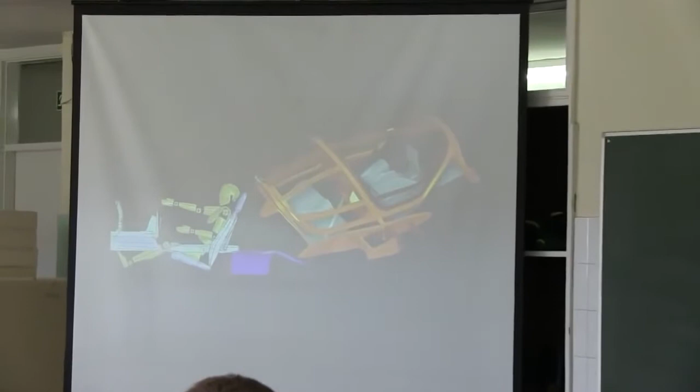First of all, the design is finalized to a much greater extent before being committed to building, on a computer in CAD design. So we had almost a completely finished design on the computer before building the first component - not just the external shape required to build the molds for composite parts, but all the control linkages, engine positioning, engine cooling, undercarriage design, since it's a retractable undercarriage, quite a complex part of the aircraft. All of this was finalized before even committing to the first piece.

And we used a lot of rapid prototyping techniques all along the project. On the left we have our own 8-axis milling machine, based on a robot arm. Here you see a block of styrofoam being milled with the internal cockpit components of the aircraft to build a mock-up of the interior, just to test the ergonomics of the aircraft. So you can see that all the structural things are already produced and designed.

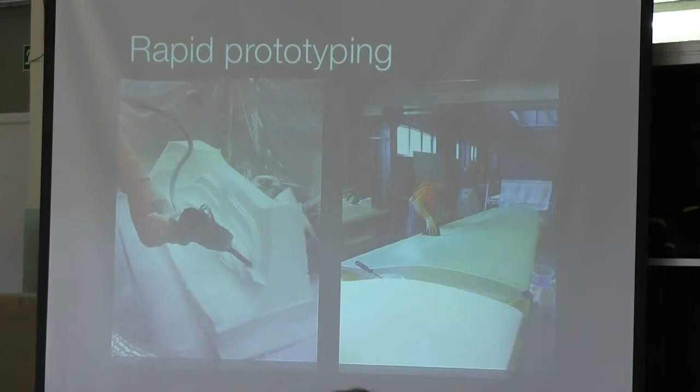The CAD model wasn't complete because it was changed later based on these tests. We built the whole ergonomic model and tested different ideas where we needed more room, where we could go with less, and where to put components - something you cannot do on a computer. That's important. You can do a lot on the computer, but not everything.

This was also a few lessons we learned during the assembly phase of the aircraft, namely how you assemble the controls, how you can access with different tools. This is something that's very hard to do on a computer. Now some research is being performed on how to do actual virtual assembly with gloves, etc., but this is still high-end research, not really something practically applicable. So then you have to redesign some things because you figure out the guys simply will not be able to build it the way you designed it. Still you try to do it beforehand, but the computer does not help you with that.

A lot of care was taken here - this is the wing model being built. What we did was mill the shape of the wing from styrofoam, then put glass fiber on top and finish the surface cleanly. We used templates with airfoils at different stations to get the twist and shape correct. This is such a delicate process that you cannot rely on the milled parts, because once you mill a piece it can twist or bend. So we built it and then checked by hand with templates each airfoil to confirm it had the right shape and twist, so the wing was really a nice piece from which to build the molds for composite parts. So really a lot more care was taken than with the competition aircraft.

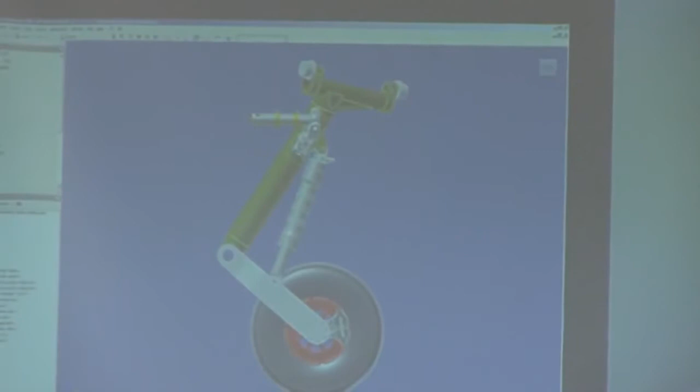What was really nice was the guys never believed it - the technology guys were used to old school design and testing. So once we put this into the aircraft, the whole system of the retractable undercarriage, which is really complex on this aircraft because no two axes are aligned and it's a special mechanism, it just fitted perfectly. That was quite an achievement, especially from the point of view of the skeptical guys in the technology department.

Interior design is something I will focus on, because in the last stage this year this was mostly what we worked on. Now this is really mostly about styling, not so much about functionality anymore, and this is where a lot of emphasis was going.

We worked with the Italian designer Massimiliano Pinucci, with whom we worked on many projects before, but none as complex as this one so far. What we wanted was to present a very professional looking environment, but still in more of an automotive style, so people feel comfortable in it. So this was the blend we were going for - really high-end technical design of the dashboard, so it's quite angular, but the parts made for comfort are much softer in design and more comfy in some sort of way. So there was a contrast between technical parts and, let's say, human parts.

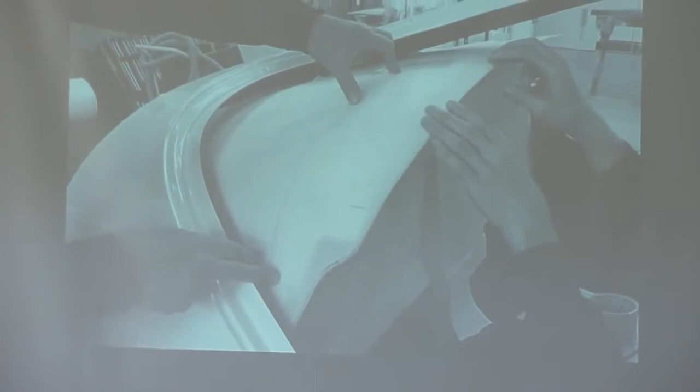What you see here is two designers working on some lines on the cockpit cutout - testing this line and how it fits in the general three-dimensional design when you look at it from different points.